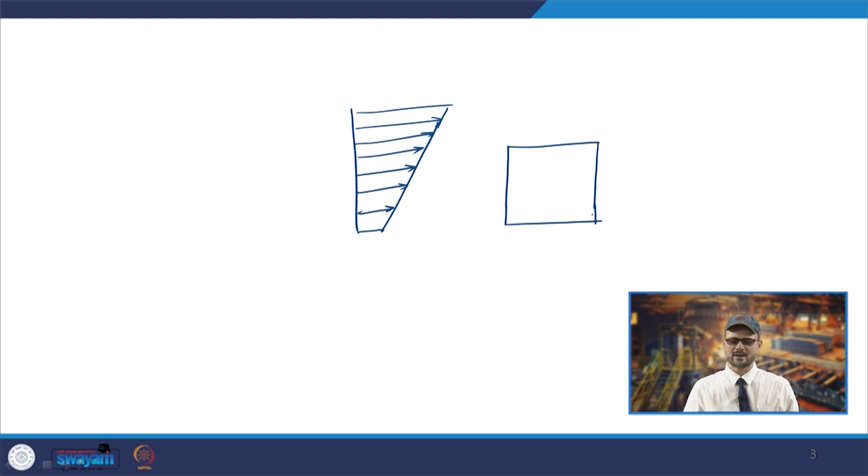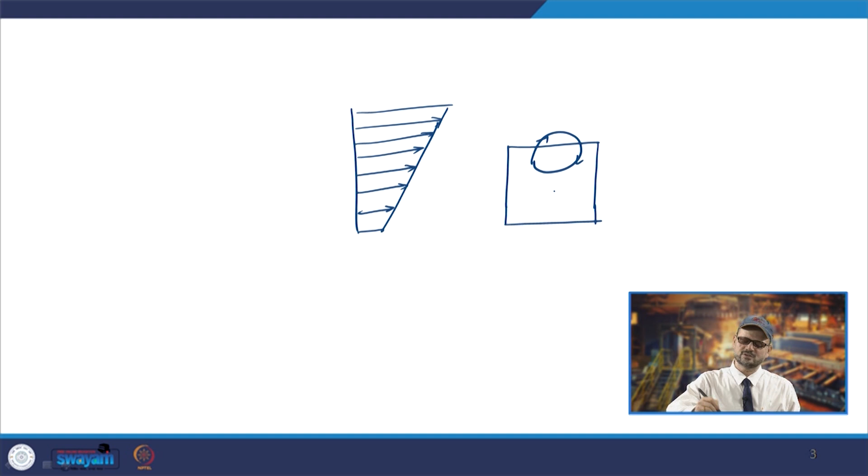What happens due to these fluctuations is the formation of eddies, and these eddies on the boundaries will be moving like this. You will have an increase in the y velocity in this direction and a decrease on the other side. Due to these eddies, on this side the fluctuating component will be more than 0, and on this side it will be less than 0.

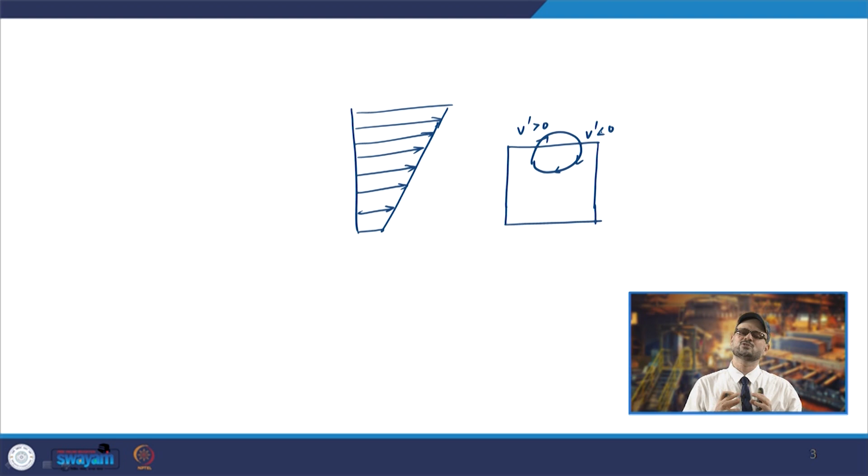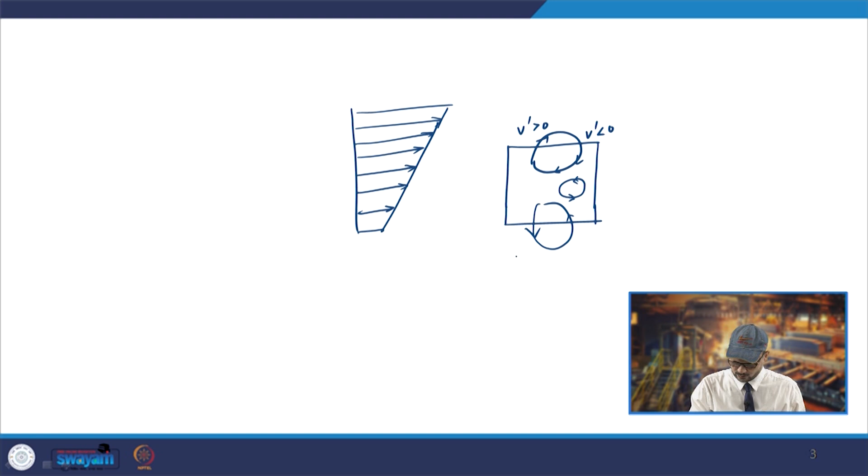This is the velocity fluctuation due to eddy formation, and you will have turbulent eddies at many places. If you talk about this surface, you will again have eddies moving in this fashion: on this side V prime is less than 0, and on the other side V prime is more than 0.

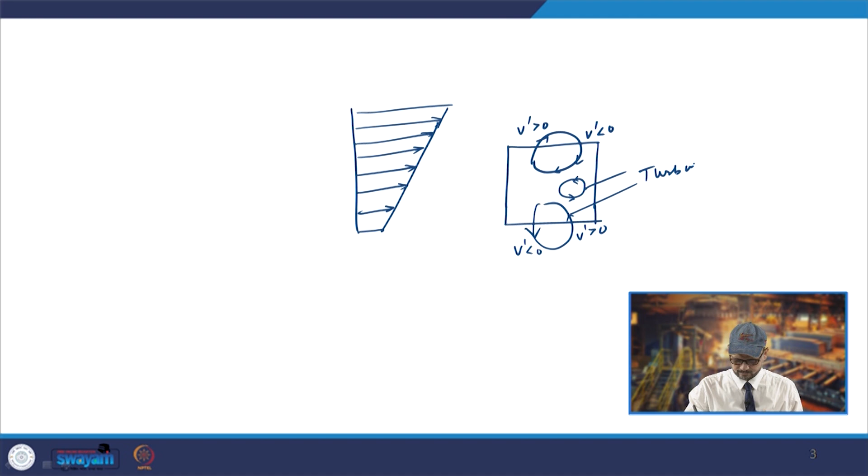These are the turbulent eddies, and they are responsible for creating very strong mixing inside, and also for the momentum exchange due to convective transport. This causes the faster fluid layers to be decelerated and slower moving layers to be accelerated.

The faster moving layer at the top will experience a braking effect, so it will be subjected to some deceleration, and the slower moving layers will be subjected to some acceleration. This happens to the velocity component, and it also happens in the presence of temperature or concentration gradients. These eddy motions generate turbulent heat or species concentration fluxes.

As we have seen, along the turbulent control volume boundaries, there will be eddies going out or inside, transported across these control volume boundaries.

These things basically lead to the generation of additional shear stresses due to this turbulence, and that is why they are called turbulent shear stresses, also known as Reynolds stresses.

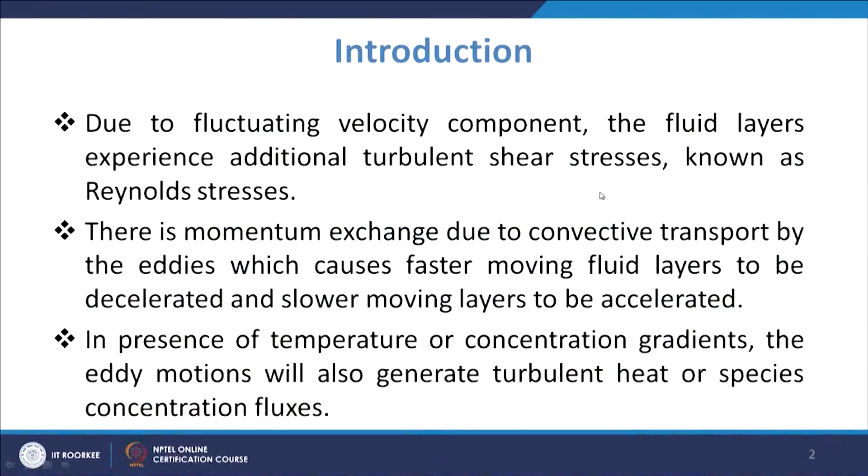There are many more fluctuating components we will see. The presence of these Reynolds stresses needs to be accounted for when we deal with the conservation equations, especially the momentum equation and even the continuity equation. These extra terms come into the Navier-Stokes equations, and they are called the Reynolds averaged Navier-Stokes equations, because the velocity has two components: one is the mean component, and the other is the fluctuating component.

Ultimately, when you are going to have the momentum equations, you will have certain components coming in additionally because of these fluctuating parts. So we will be talking about these Reynolds averaged Navier-Stokes equations. Now before that, we must know certain things.

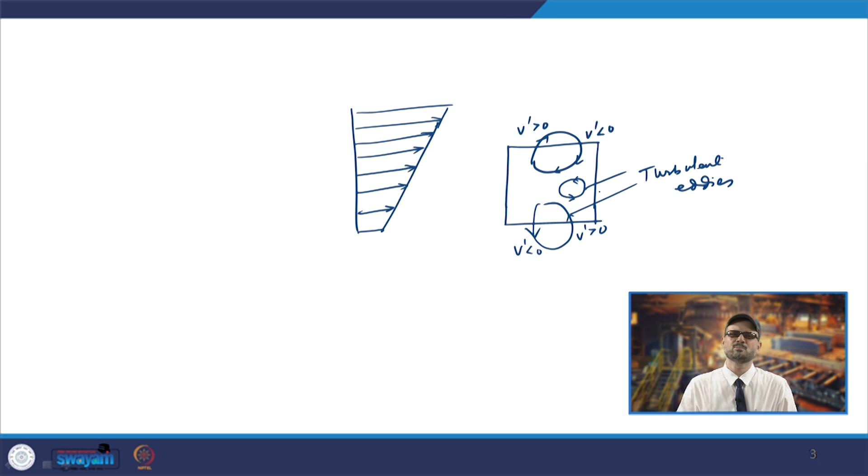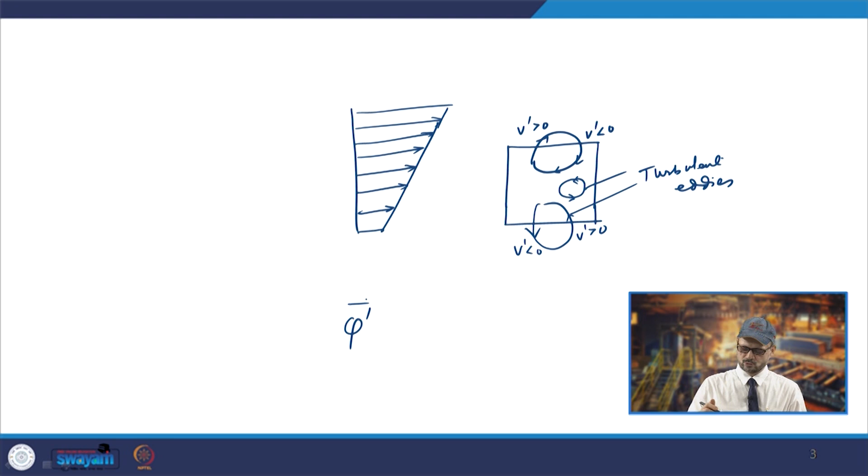If you talk about the fluctuation components, so you have the average. If you talk about the fluctuating part only, we have to consider certain points: if you take the average of the fluctuating properties, that has to be taken as 0. If you take another property like psi, for that also, if you take the average of the fluctuating component, it is taken as 0.

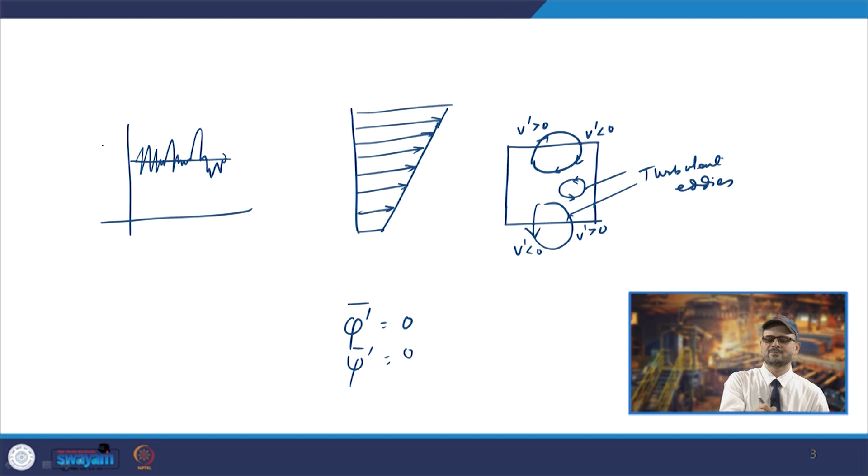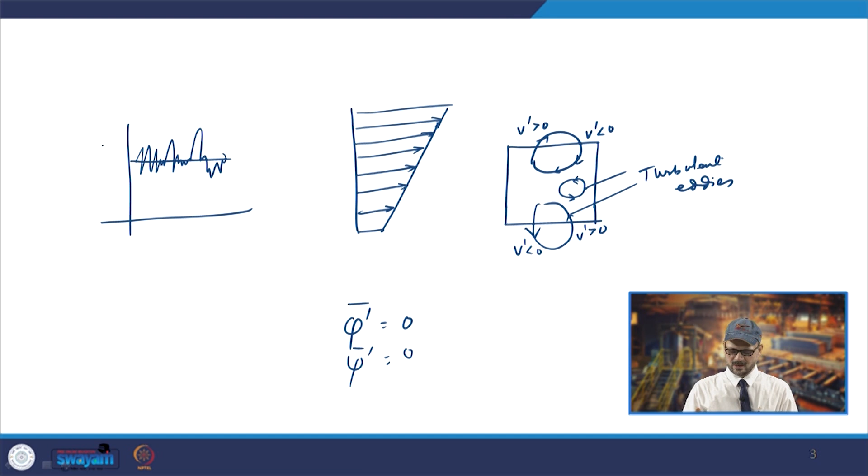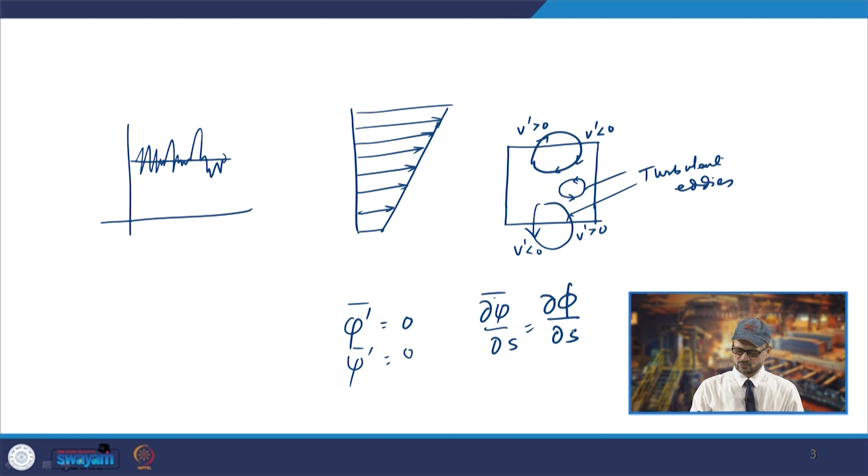If you talk about other things, like if you have del phi upon del s, and you take the average, that will be nothing but del of phi by del s. So that way we take it as these values, that will be the mean part. Similarly, if you have the part like this plus this, its mean will be the mean plus the mean separated.

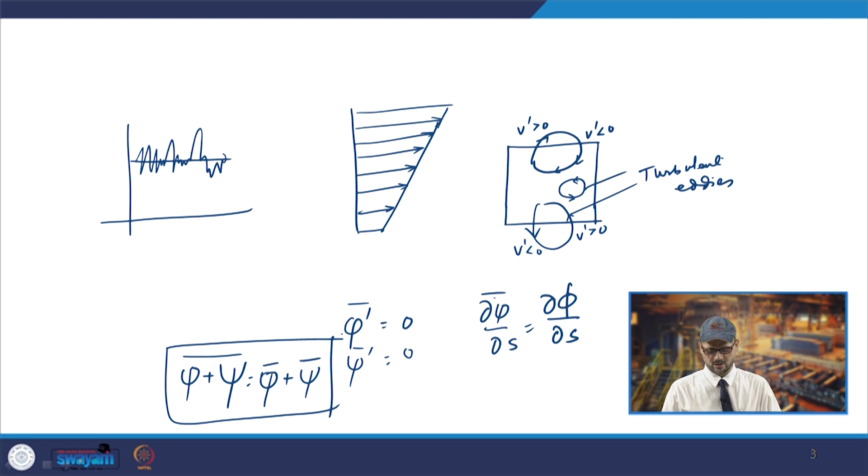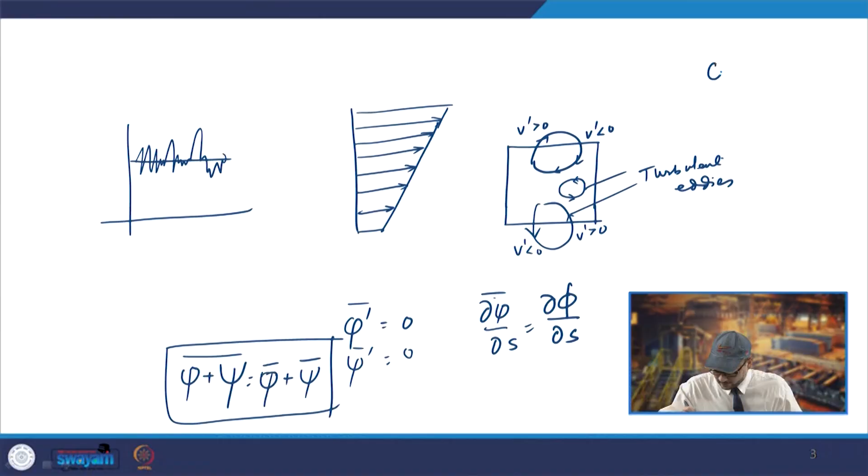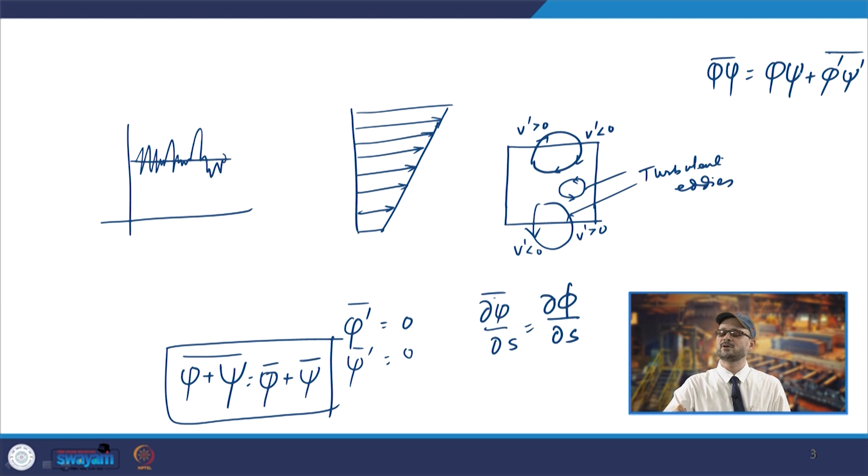There are certain properties we will use while we discuss this. Basically you need to know certain things when we do time averaging. At that time we need to use: if you have two properties and you are taking the average of this product, it will be phi psi plus phi prime psi prime, and its average is not going to be equal to 0. You can have other components where one of the properties' mean will be taken, fluctuating parts' mean will be taken, and that will anyway automatically be 0. These are the concepts to be used for that.

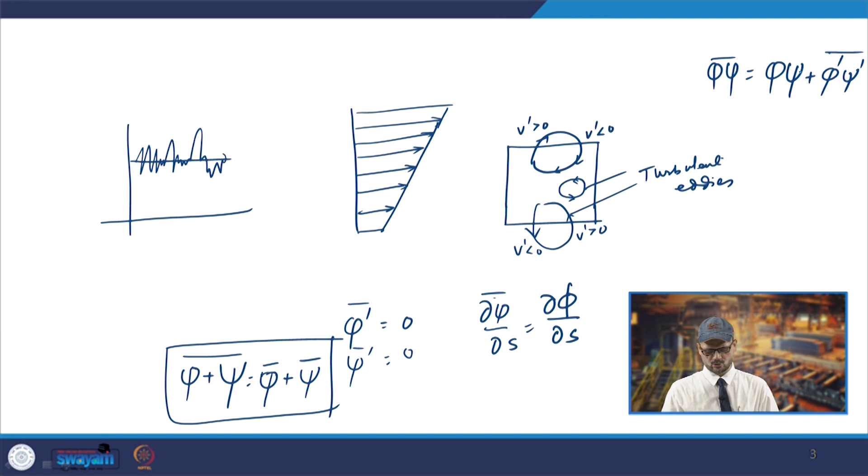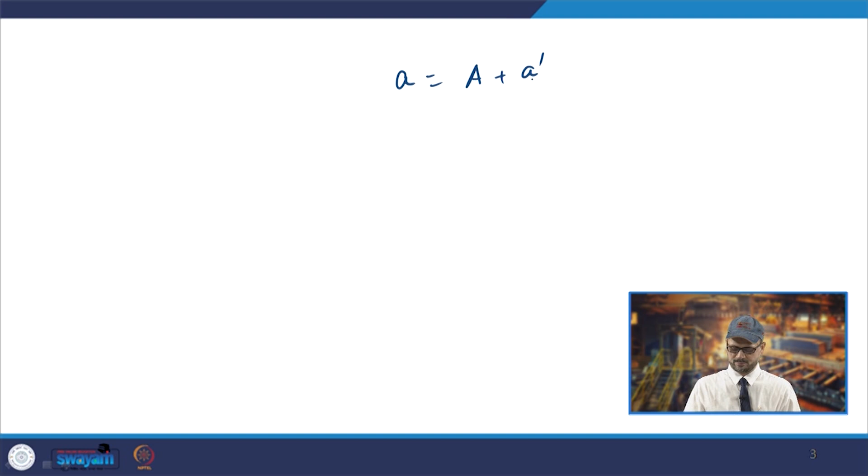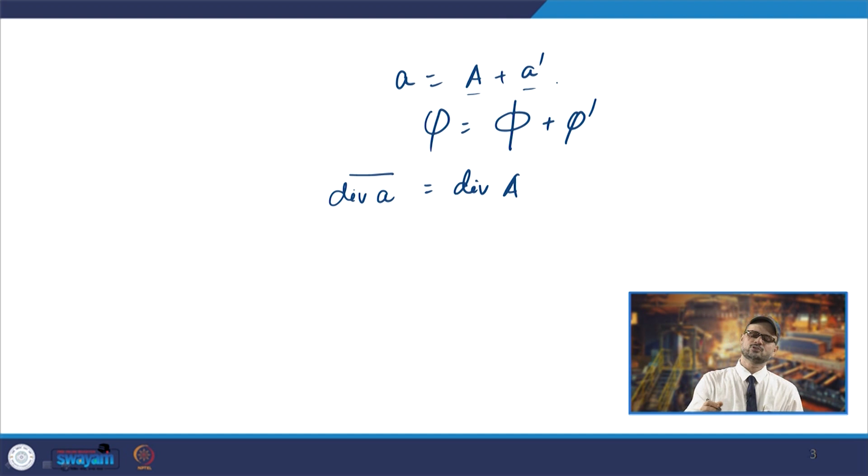So what happens is, if you take the div of A, its mean will be div of A, the mean part, and this is the fluctuating part. If you take the div, this part will anyway be 0, because its change with time, or if you do averaging, it will be 0. Similarly, if you take div of phi A, it will be div of phi A, that is the mean parts' product, and then it will be div of phi prime A prime and its mean. So these also need to be kept in mind.

Similarly, div of grad phi, and its whole mean, its averaging, that will give us div of grad of the mean part. So basically this is the mean part we are having. This is because when we use these equations, when we take any quantity as the summation of the mean quantity and the fluctuating part, these expressions will be required.

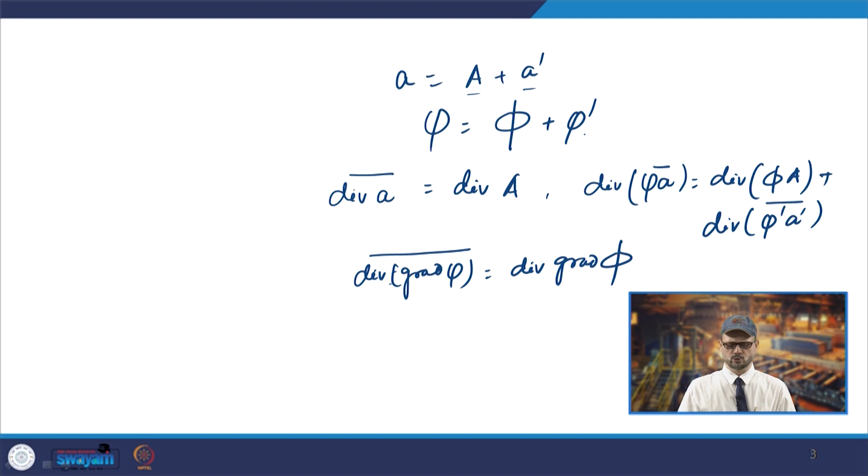Now if you try to see the Navier-Stokes equation, if you try to find the instantaneous continuity as well as the Navier-Stokes equation for vector u, the equation becomes div of u equals 0. This is your instantaneous continuity equation. Similarly, you will have the Navier-Stokes equation that we have already seen.

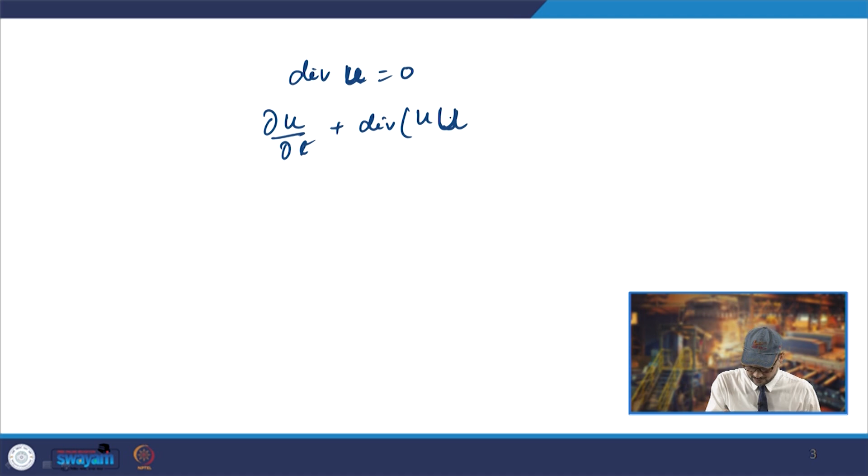It will be dou u by dou t plus div of uu, and this is basically bold one, meaning this will be the sum of the two quantities, one is the mean quantity and one is the fluctuating part. So div of uu, that will be minus of 1 by rho, dou p by dou x, plus nu of div grad u.

So, that way what we see, this is your x momentum equation, that is what you get, this x component equation. Similarly, you have the y component and z component.

So, you will have dou v by dou t plus dive of v and u, this will be again the bold one, and that will be minus 1 by rho dou p by dou y plus nu and then dive and grad of u v. So, that time it will be v.

Then similarly, if you take the w momentum equation, so that will be dou w by dou t plus dive of w u, this is again the bold one, so that will be minus of 1 by rho dou p by dou z plus nu of dive of grad w.

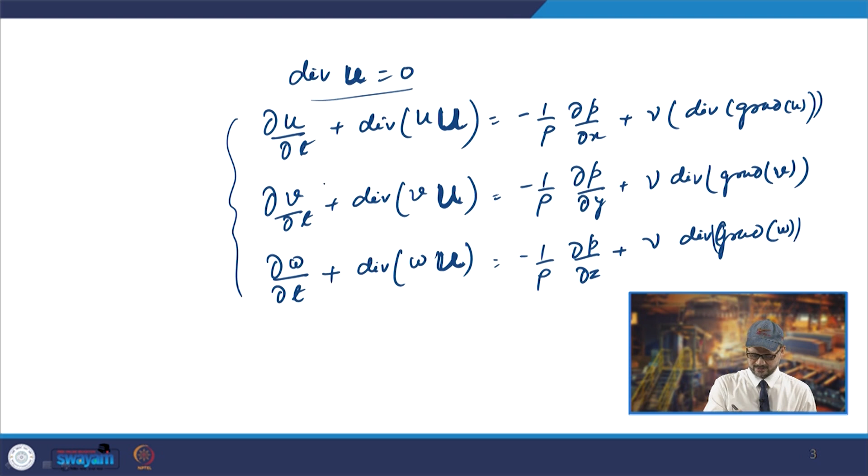So, that way we use these, these are the instantaneous continuity equation, and this is the Navier-Stokes equations in the Cartesian coordinate system. The velocity vector u has 3 components u, v and w, and in that case this will be your instantaneous equations.

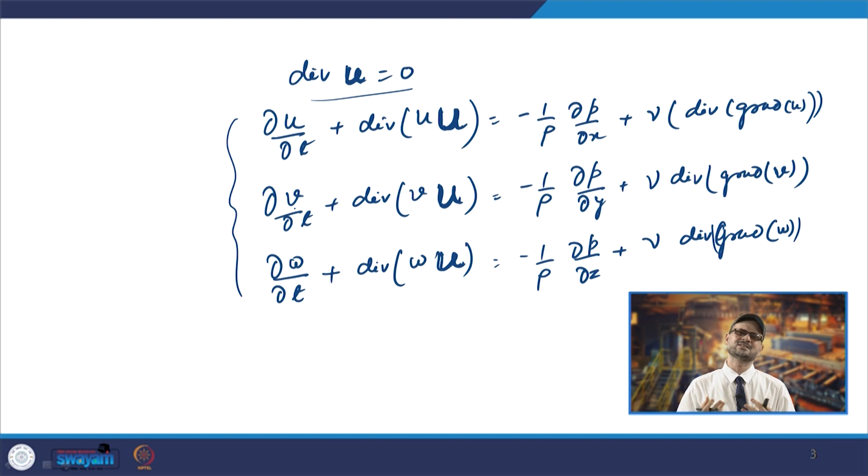Now, when we talk about the turbulent flow, you will have the mean component as well as the fluctuating component. So, when we talk about these variables, what will happen? You will have the Reynolds decomposition.

So, in that what is done is this u, as you see, you will have the component u, v and w, and also it will have the fluctuating component. So, u will be the mean component plus this is the fluctuating component.

Similarly, its x component is u, so that will be mean u plus fluctuating u, that is u prime. V will be mean v plus fluctuating v, that is v prime. So, that way you have to take these components taken together.

Now, we have to use the time averaging and then we have to apply those rules. So, if you go for the continuity equation for the mean flow, especially for the incompressible flow, in those case what is happening, your dive of this u prime will be basically 0.

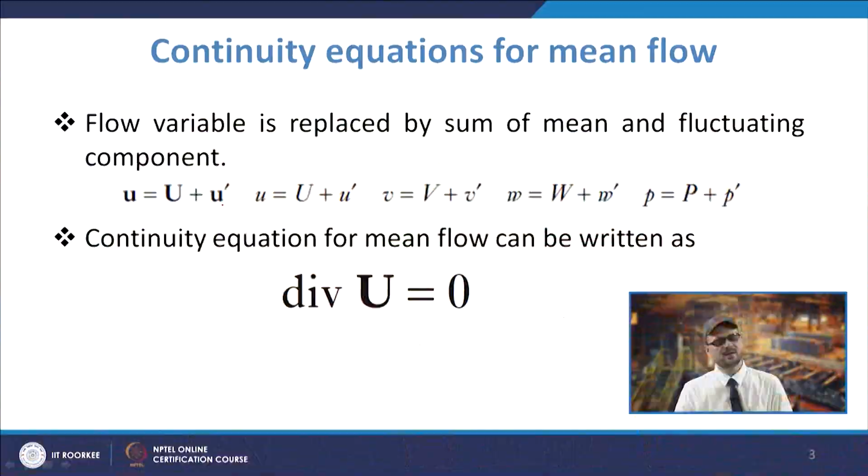So, ultimately your equation of continuity for the mean flow becomes dive of U equal to 0. So, dive U equal to 0, that means dive of U equal to 0. So, this is giving you the continuity equation for the mean flow.

Now, we have to find the equation for the x momentum, y momentum and the z momentum, and we have to do the time averaging of the individual terms. So, if you do some homework, what we see is if you find the dou u by dou t.

So, as you know that u will be capital U plus u prime, so it will be basically dou capital U by dou t, because u prime dou u prime by dou t will be 0. So, that will be it.

Similarly, if you find the dive of u and this u, and that is averaging of this, it will be dive of capital U, and this will be the bold one, and then it will be plus dive of u prime and this will be the bold component, that is prime.

So, that way whatever we have studied earlier, similarly minus of 1 by rho dou p by dou x and its average, that will again have the minus of dou capital P by dou x. So, that is again mean component will be coming into it.

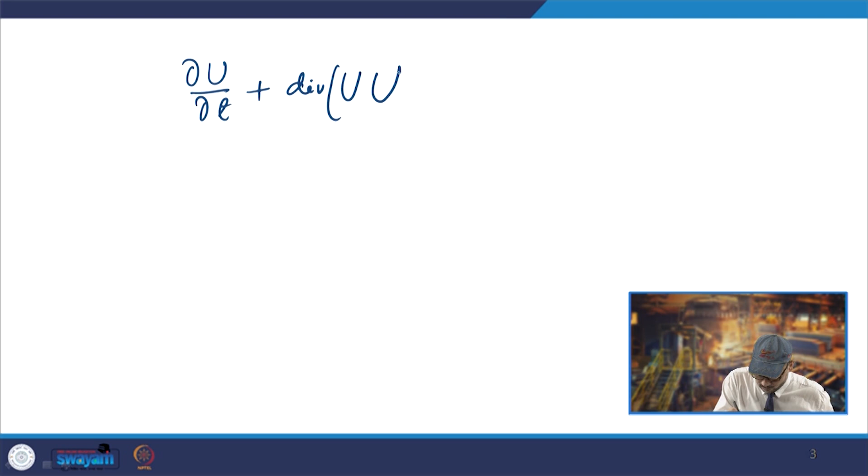So if you take these turbulent stresses on the right hand side, then your equation becomes dou u by dou t as the first term. Second term is as usual, you have div of u, and this will be the bold u.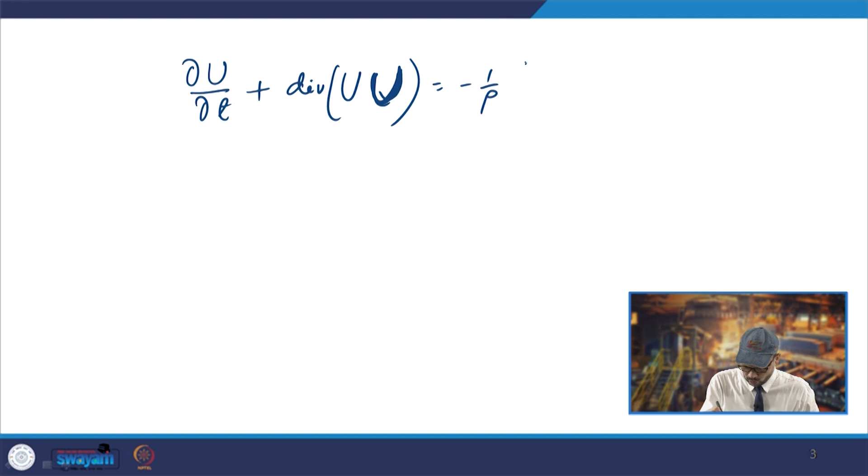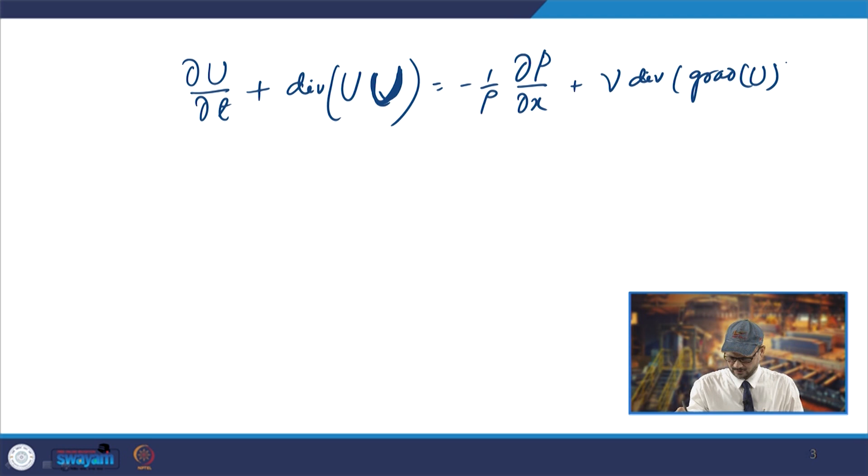So this is the bold part, then that will be again 1 by rho dou of capital P by dou x, again mean pressure has come here. Then you have nu of div of grad u, that is coming further.

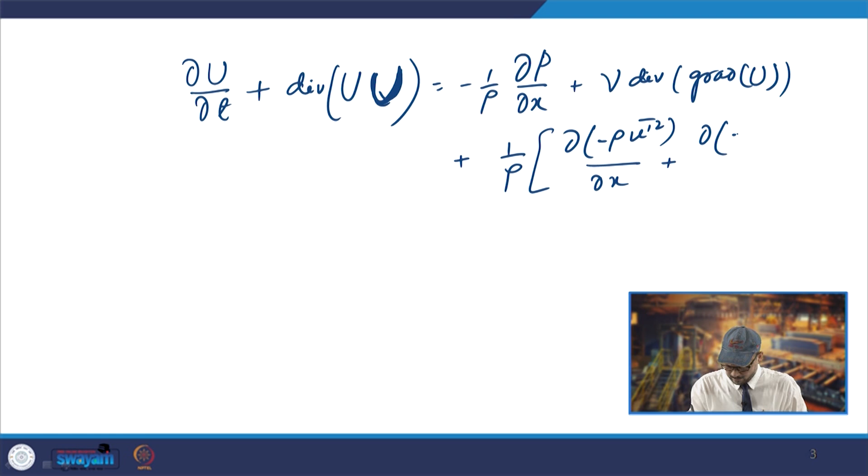And then we have another term: 1 by rho, now this is your component which will be, you are taking the div of those components. So that will be dou of minus of rho u prime square by dou x, similarly dou of minus of rho u prime v prime by dou y, plus dou of minus of rho u prime w prime by dou z.

So these terminologies will come if you try to expand it, because this u prime will be u prime plus v prime plus w prime, this bold u. So that will be u prime plus v prime plus w prime, so it will have u prime square, and then u prime v prime plus u prime w prime, all the averaging will be done, and its div: dou by dou x plus dou by dou y plus dou by dou z. So that is what you are getting, these three terminologies which come on the right hand side, and this is because of these turbulent shear stresses.

So if you try to write these equations further, for the v momentum you will have dou v by dou t plus div of v u, so you will have v u.

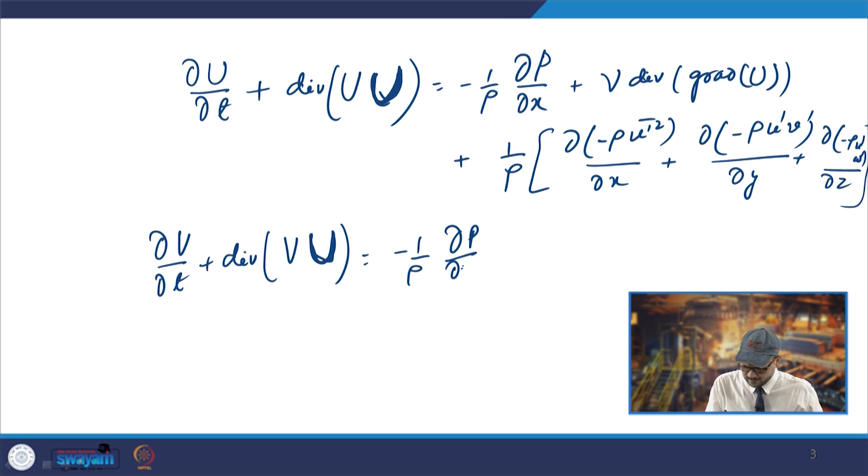So, u is bold, and that will be minus of 1 by rho, dou p by dou y, and then you have nu div of grad v. So, and then you will have again 1 by rho, and now this time you will have dou of minus rho u prime v prime by dou x, plus dou of minus rho v prime square, by dou y, plus dou of minus rho v prime w prime by dou z. So that will be coming.

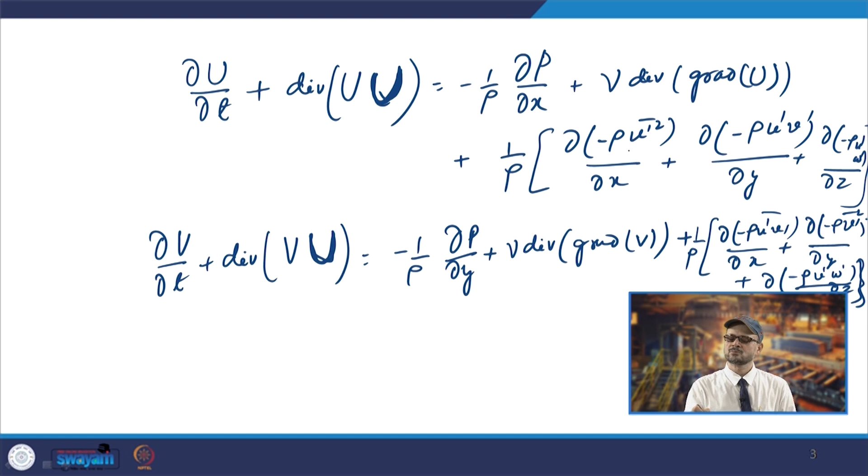So, this way you will have three equations. These extra stresses, these terminologies which we have taken from the left hand side towards the right hand side, your equation becomes like this.

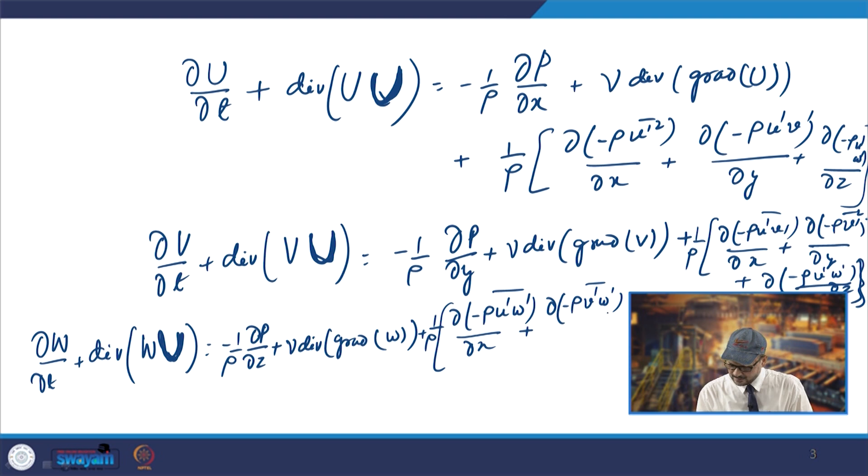So, you will have dou w by dou t plus div of w u. That will be minus of 1 by rho dou p by dou z plus nu of div of grad w, and then plus 1 by rho, and this time you will have dou of minus rho u prime w prime by dou x, plus dou of minus rho v prime w prime, and its average part also, divided by dou y, plus dou of minus rho w prime square, divided by dou z.

So, that is this way you are getting these same equations, but once you expand it and take towards the right hand side, because all the stresses we are taking on the right hand side, that will give you these three equations.

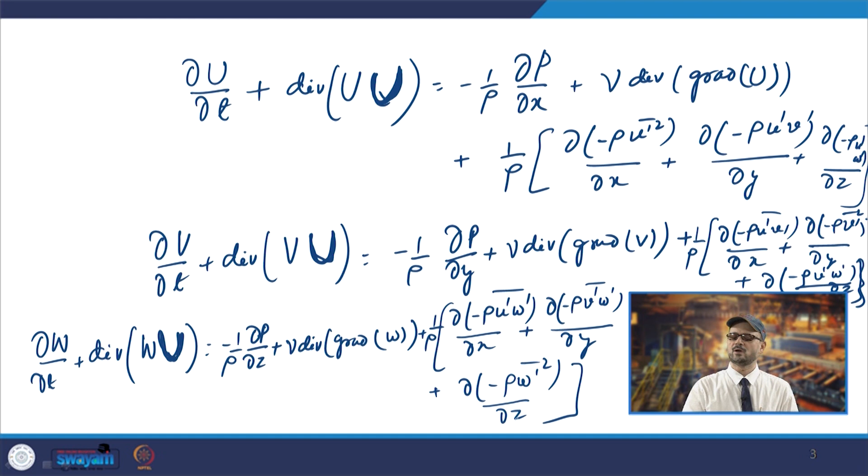Now, if you look at the equations, this minus of rho, this is u prime, this is basically u prime square. Now, this minus of rho u prime square, so this is basically tau xx.

Similarly, minus of rho u prime v prime, it will be tau xy. So, that is why we can write tau xx as minus of rho u prime square. That is the turbulent stress.

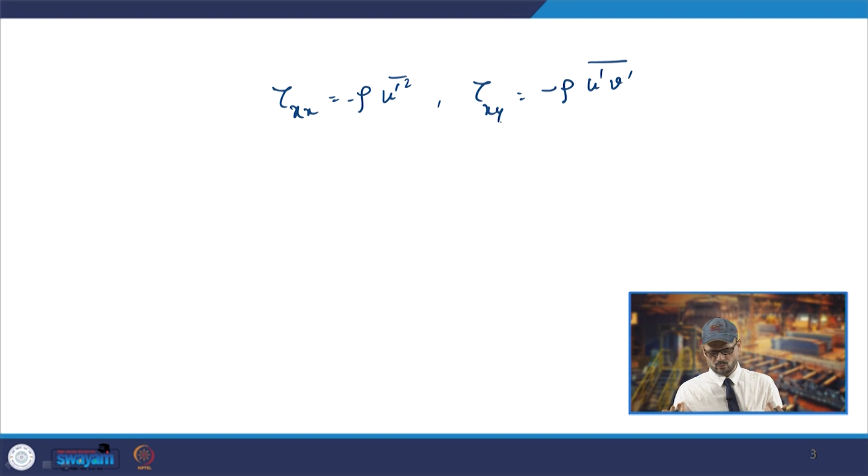For that you have tau xy, this will be minus of rho u prime v prime. Similarly, tau xy is tau yx, and tau yy will be minus of rho v prime square, averaging of that, and tau zz will be actually minus of rho w prime square. So that way, tau xy will be same as tau yx.

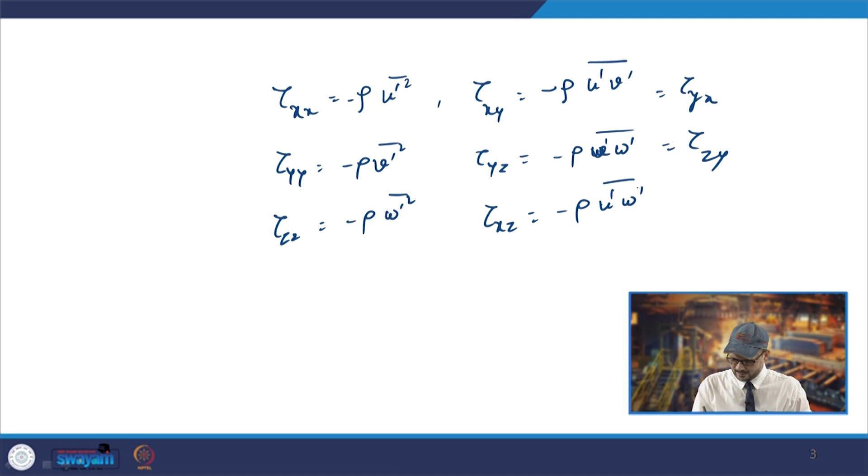Similarly, tau yz will be minus of rho v prime w prime, that will be tau zy, and similarly tau xz will be minus of rho u prime w prime, and that will be tau zx.

So this way these stress terms are appearing on the right hand side, and these are known as the Reynolds averaged Navier-Stokes equations. Now, if you try to find any extra turbulent term which will be because of the transportation of certain scalar quantity like temperature or so.

So, in those cases you will have the time average transport equation, for any scalar quantity, transport scalar quantity phi. So, for this transport scalar quantity phi, you will have these time averaging equations.

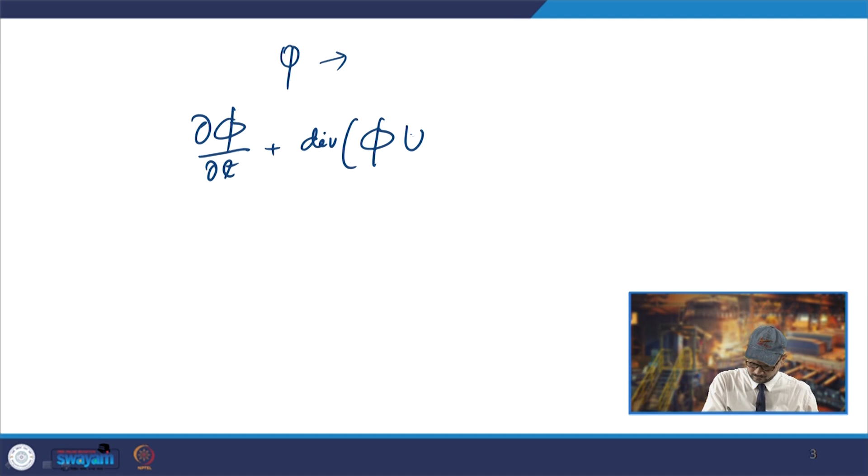So, you will have the mean part of it, dou phi by dou t, that will be mean part of phi plus phi prime. So, that we have discussed, plus div of phi, and you will have u, that is bold one, so a convective term, then that will be again minus 1 by rho and div of gamma phi. So this is grad of the mean part, and plus you will have minus of

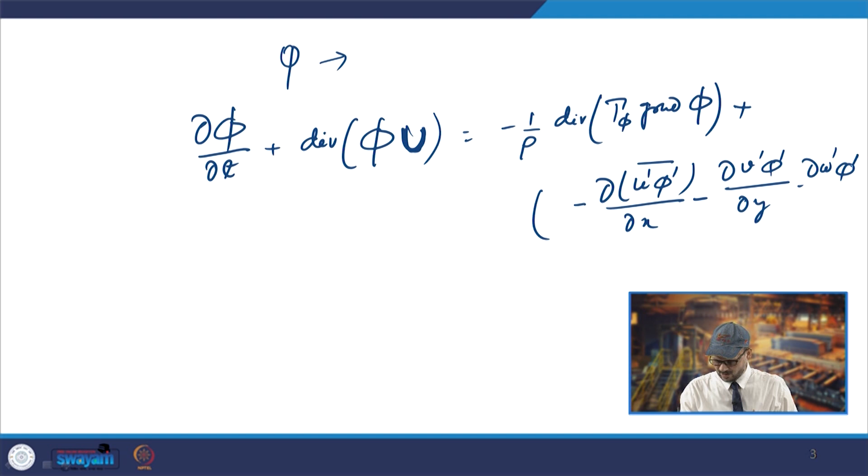dou of u prime phi prime by dou x, similarly v prime phi prime by dou y, then w prime phi prime by dou z. So this way you will have the transport equation for any scalar.

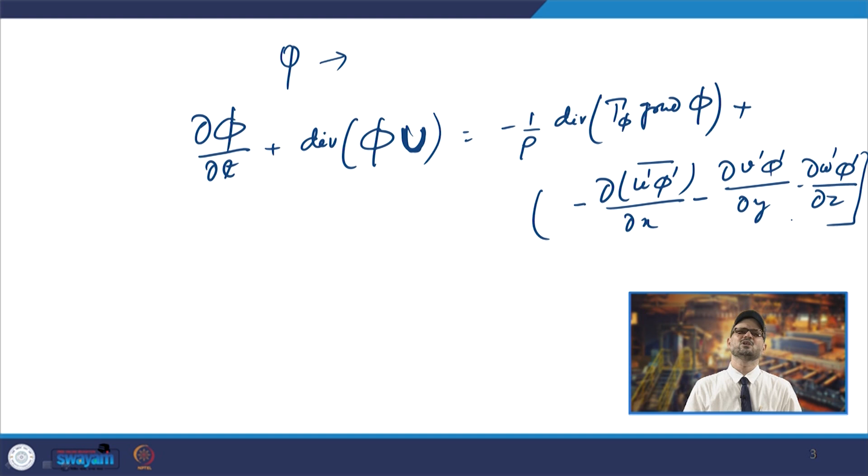Normally we will have the equation for the temperature or any other quantity when we have it. So we normally have these equations also. This is what you get normally, with the extra term which you are getting. So, these are the equations.

These are known as the Reynolds average Navier-Stokes equations, because we are doing the averaging and taking the fluctuating part into component, and this will be used while we try to study or model turbulent equations or turbulent flows. So that we will see in our coming lectures.